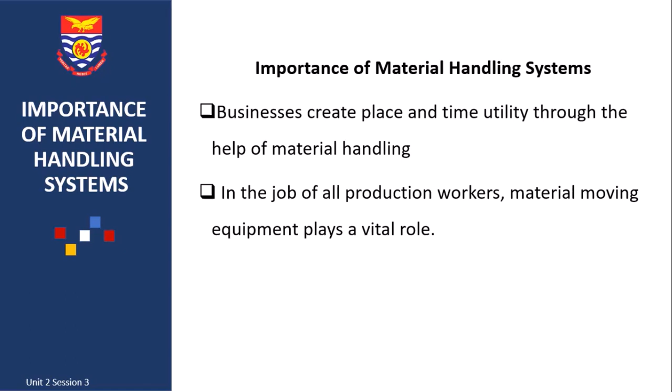So in the job of all production workers, movement of materials and the equipment required to move these materials play a vital role. And operators use these machines or equipment to conveniently move items in industrial settings, which include moving construction goods in building sites. So it is key that you determine the right equipment when designing a warehouse layout or when putting in place warehouse management systems. You have to ensure that you consider the equipment that is going to be used in the warehouse because in essence it will help to achieve efficiency of the personnel in the warehouse and even at factory floors.

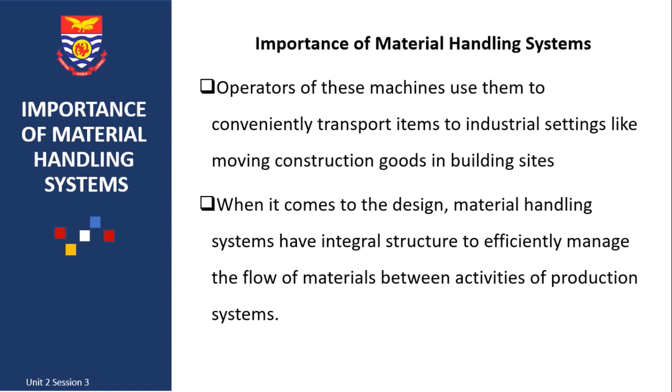So when it comes to design, material handling systems have integral structure to efficiently manage the flow of materials between activities of production systems. So it is necessary that in a typical warehouse, the safety of employees is assured and ensured as much as possible. Where material transportation occurs, it is a growing need across most industries that you ensure the safety of the personnel who work at the factory floors. This is because of the increase in accidents at warehouse facilities over time. So you have to ensure that material handling equipment is provided to ensure that the right items are moved with the right materials and less effort is put in by employees to move heavy items.

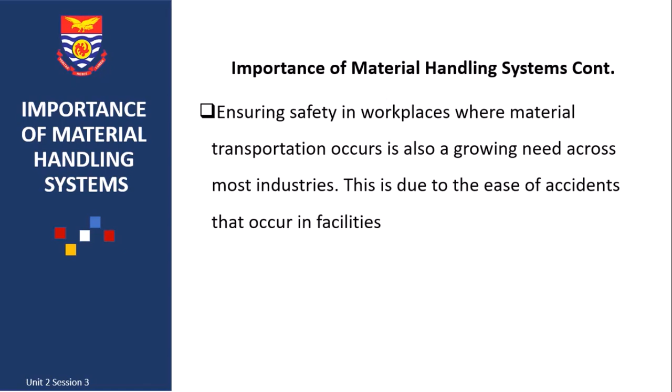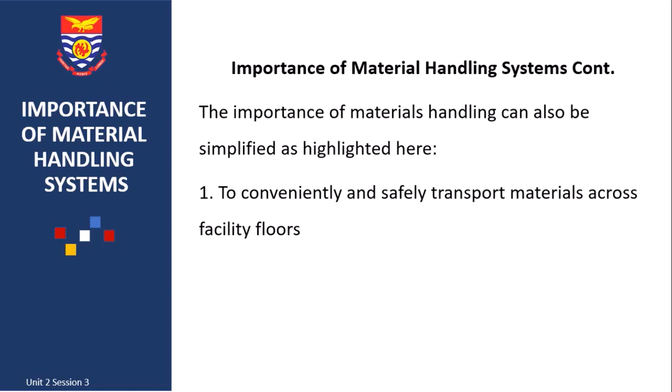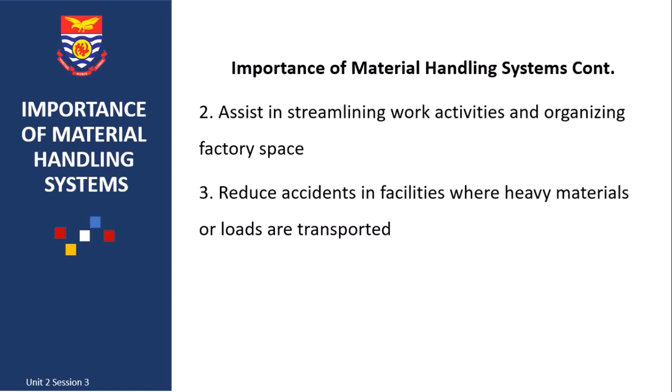So why is it necessary to have good material handling systems in place? It helps to improve efficiency. That is, when the right material handling equipment is used for the right handling process, there is little or no waste in warehouse operations. For instance, a forklift truck is used to move items or unit loads that have even shape. But if you decide that you're going to use a forklift truck to load iron rods, which are more uneven in nature, you are going to incur a lot of waste because in essence the forklift truck cannot balance the movement of the iron rods on the pallet.

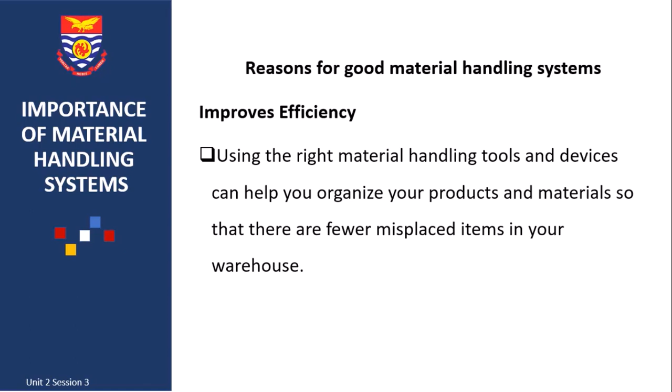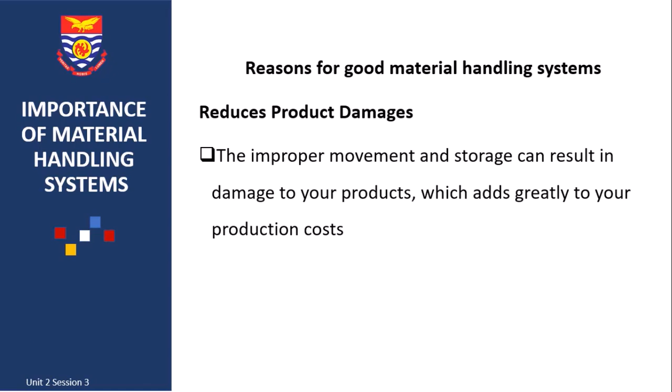It also helps to reduce product damages. So let's take another example where items are supposed to be moved in crates or in bins, but you decide not to move them in the acceptable package. For instance, if you are to move nails, because of their uneven nature, they have to be packaged in bins so that they do not perforate loose containers. But if you decide to use paper packaging for nails, they are likely to pierce through the boxes and hurt whoever is carrying the nails. So determining the proper material handling equipment in a given situation is key so as to reduce product and personal damages.

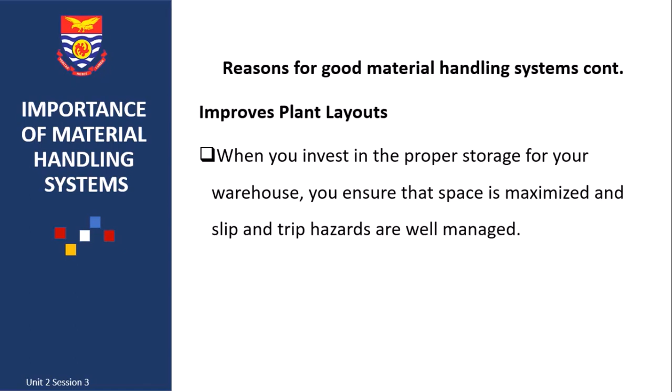Properly designing a good material handling system also helps to improve plant layout. Because of the principles of unitization and packaging, material handling helps to ensure that the right storage materials are used and the right storage is adopted to keep items in a warehouse, thereby utilizing space as well as the entire warehouse facility layout. Properly designing material handling equipment or systems helps to avoid accidents. A typical example is the nail instance. If the right material handling equipment is used for storing nails in a warehouse, it will avoid the harm that is going to be caused to employees who handle the movement of these nails from one point to another.

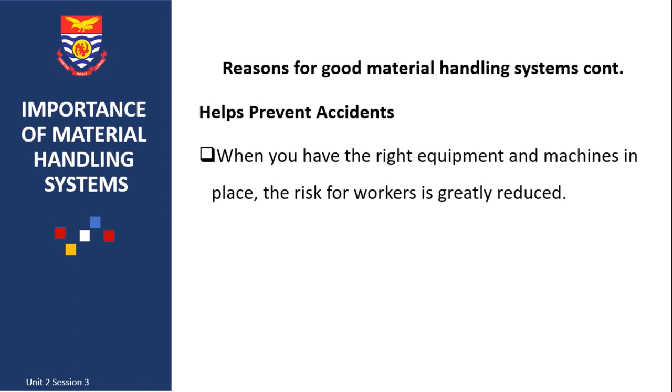It also helps to improve customer service because in the end, let's say you use white styrofoam to package a television and you make it available to a customer. If the customer receives the television without a scratch, as a result of the styrofoam that was supporting the television, in the end the customer will be satisfied with the service that the organization has rendered to them as a result of the packaging that the organization adopted for their products.

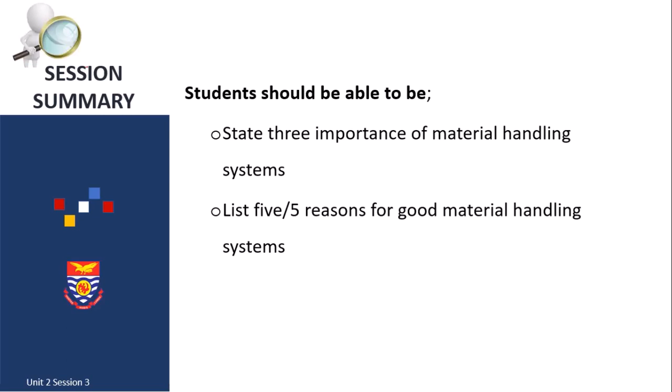So this session has looked at the importance of material handling as well as reasons for good material handling systems.